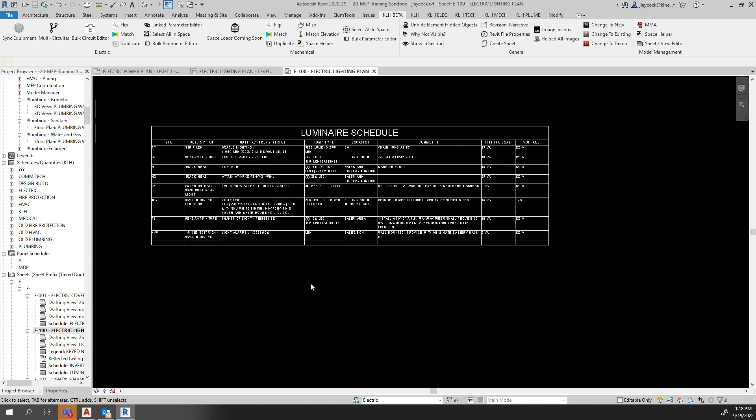In this video, we will be reviewing bulk parameter editor as it relates to the electrical tool set. There are two ways to get data into the bulk parameter editor. One is to simply run the tool and open up the interface. This is a modeless interface, so it can be moved to other screens while working in Revit.

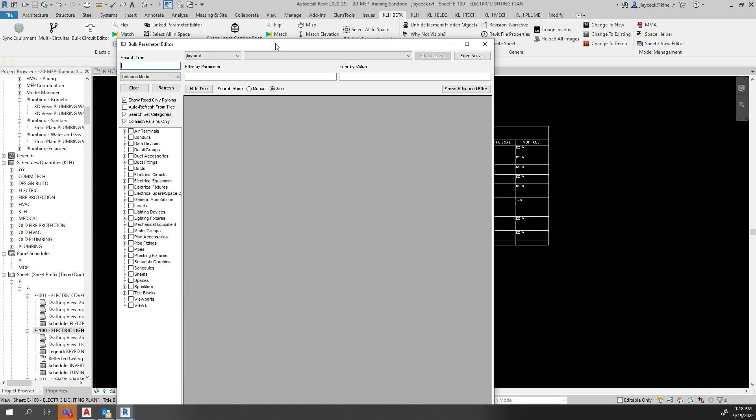There's an instance mode and then there's a type mode. The instance mode shows every element within the selected category on the user interface. The type mode only shows each individual type as a line item. You can also check whether you show read-only parameters, search set categories, or common parameters only to help narrow down your search. Sometimes read-only parameters, though they cannot be edited, help uniquely identify which elements you're looking at.

Bulk parameter is one of the most versatile tools. It allows us to see different categories and each individual element, not only to bulk edit the parameters, but also manage the data. There's a lot of parameters within the model, so this tool helps to manage that so that we can see everything in one interface.

We can narrow down our searches. Revit is very schedule based, so this helps us add the correct parameters to each element to create these schedules, to make them more visible as well as shown correctly and make sure that everything is accounted for. This can be done within the single model or also can be searched outside and in linked models.

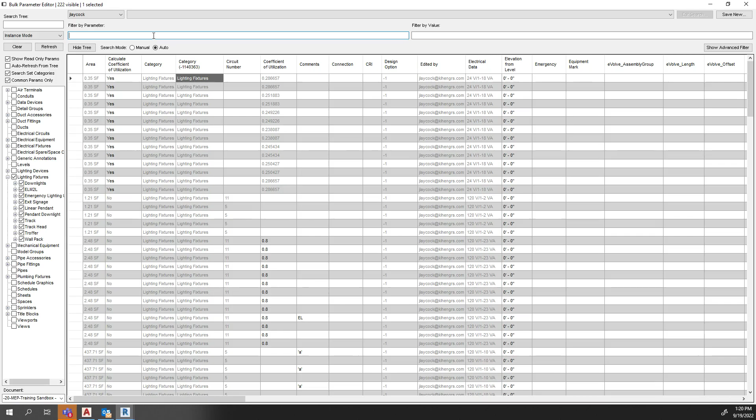To help narrow down this, you can either type in filters manually, separated by a semicolon, or use the column picker. Right click, or your shortcut is C within the tool. Here I can add any parameters similar to a schedule. This helps me view all of the different elements and narrow down the categories and parameters that I want to see.

For example, I may want to see the family and type. Though I may not be able to edit this, it does help me identify the different data. I can also add, for example, circuit number and panel. Maybe I want to see the comments, and let's do an emergency inverter. This is a custom parameter that is based on a schedule. Any fixture with this inverter ID then gets populated to a schedule to help identify how large the inverter needs to be.

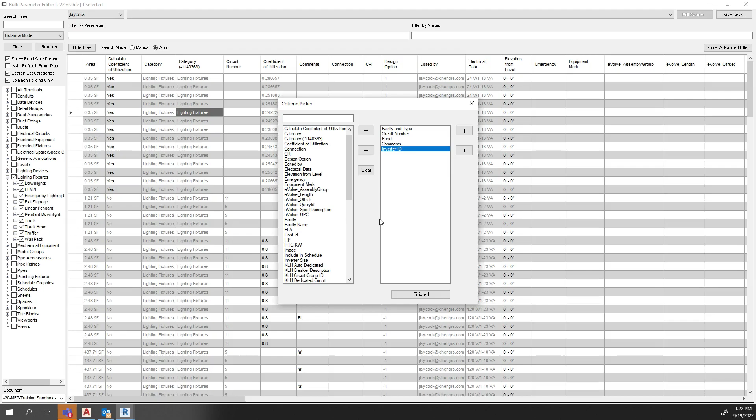In this way, bulk parameter editor can be edited and used in a way that is best for your organization. I can also filter by value. There's still a lot of light fixtures here. So if I just want to see the light fixtures on the inverter, simply type in INV to help narrow down only showing the elements with INV within these parameters.

Here, I can edit them by right-clicking, applying value, or my shortcut A. I can also double-click on individual elements to, for example, erase or change it. For example, if I wanted to change these all to egress lighting.

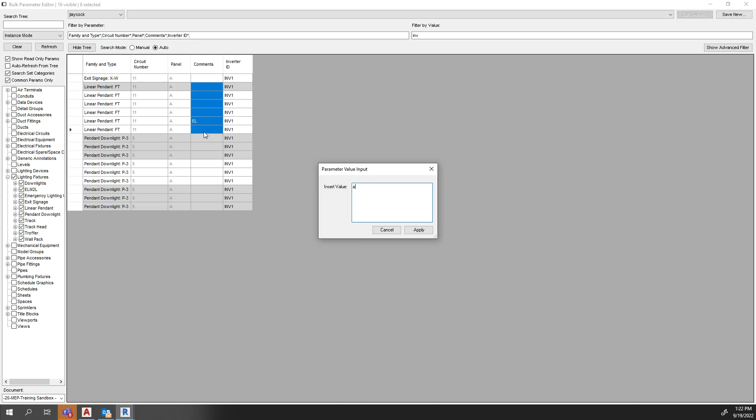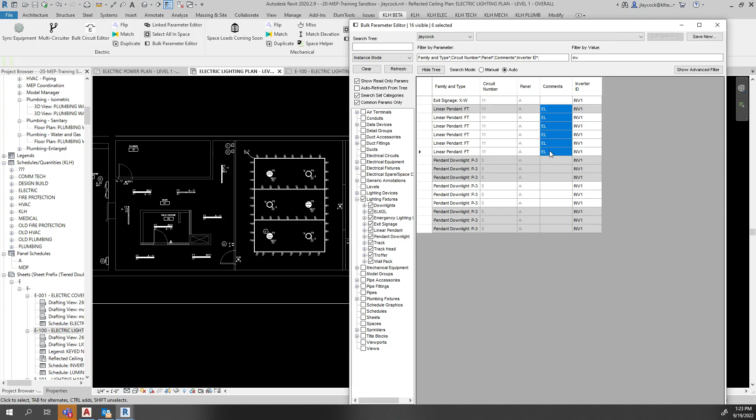I can also use this in conjunction with match and multi-circuiter to help speed up the process of selecting elements. The way I do that is moving to the lighting plan, for example. I can select certain elements, right click and select in Revit. I can also show in Revit and show in section. This helps speed up and find different elements quickly within the grid.

For example, I can select here and then edit any parameters. This is also useful for finding elements that are off in space. For example, if I find a light fixture that is uncircuited, I can select it in Revit and delete it so that it is not accounted for in my counts.

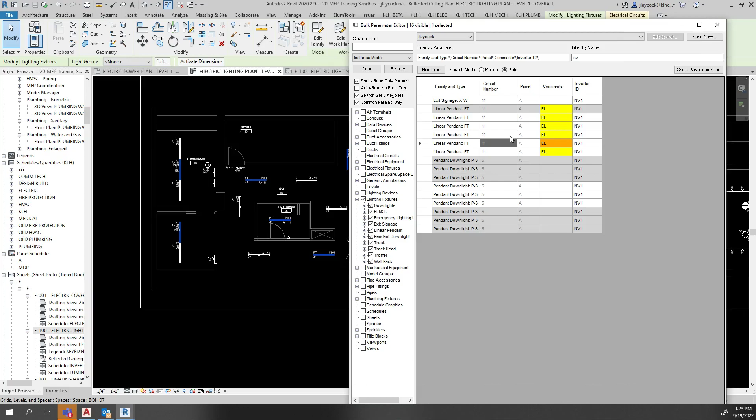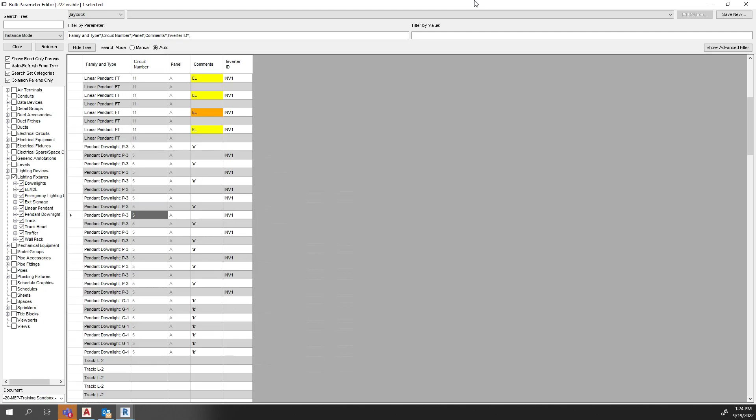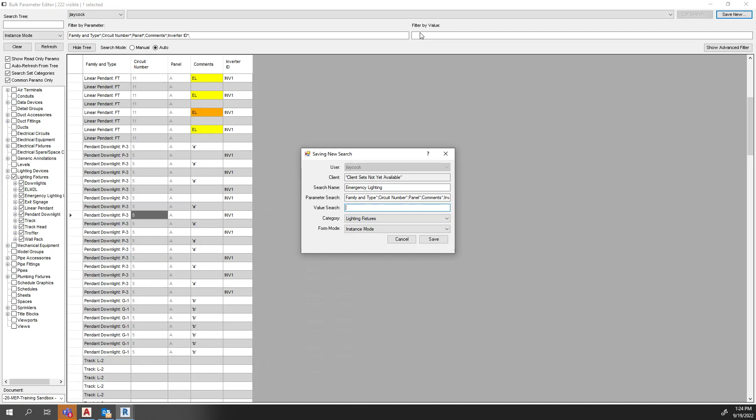Here, I can also save my searches. This, for example, I may use on multiple different models and different projects later. So I can save this. Let's call it emergency lighting. I can also save specific values, and that would correspond with this here, the filter by value within the parameter. Or I can leave it blank.

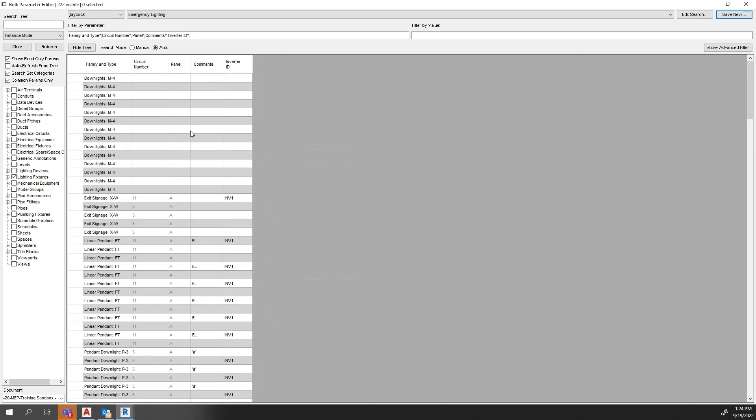When I save this, the category is automatically selected along with the family, type, circuit number, panel, comments, and inverter ID, all of the columns that I had picked previously. Now, next time I get into Bulk Parameter Editor, I can do the drop down and select emergency lighting and quickly get to my filters.

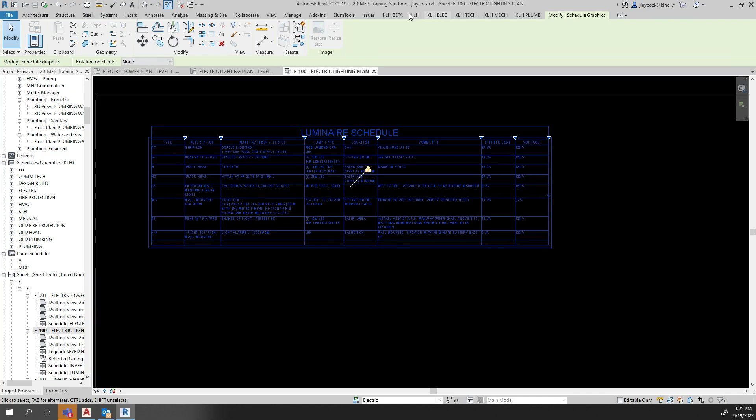Another way to use this is editing schedules. Sometimes editing schedules can be cumbersome and will not always take when editing them. Here I can simply run the command. You can also run a shortcut.

This has prompted me to show in type mode, as it suggests the luminaire schedule has mostly type fixtures. So if I click yes, it will automatically select the light fixture category, as well as each individual type and all the parameters within that schedule. Now I can easily manipulate this schedule much faster than I would for a schedule directly. This allows me, for example, to edit multiple at a time.